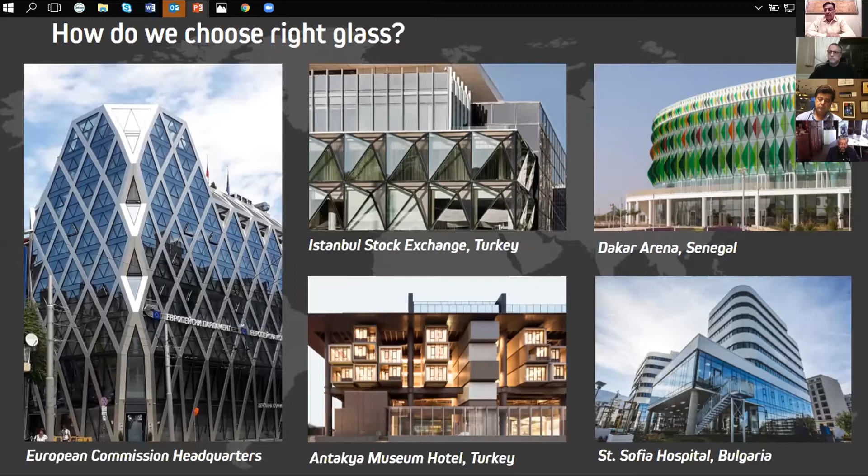What do we do? During the design stage of a project, architects share their first drawings with us, and together we work on their preliminary design and recommend not only the right product according to climate and function of the building, but also tips for optimum budgeting. Then at the application drawings stage comes static and performance calculations. We calculate performance values of the requested combinations, then share reports of the performance values and specification documents with the architects, engineers, or investors in order to include in bid documentation.

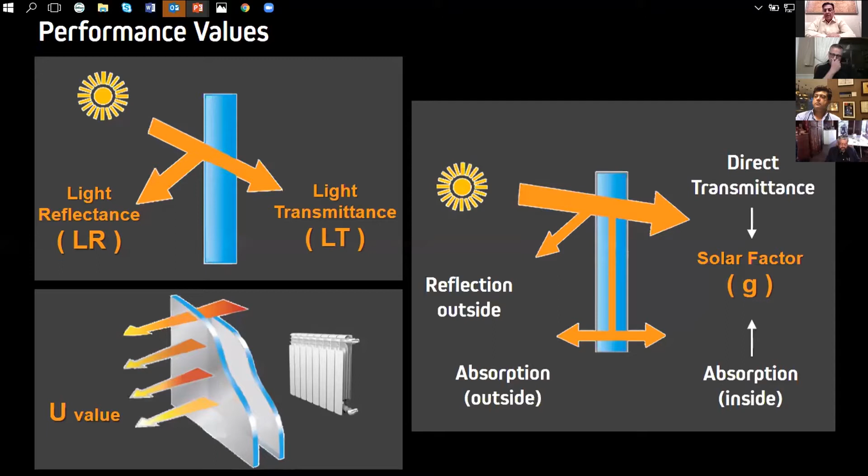Let me start by explaining some of the performance values defined in glass. Light transmittance is the proportion of visible light that is transmitted through the glass. Light reflectance is the proportion of visible light that is reflected from glass. Solar factor is the percentage of total solar radiant heat energy entering the inner space through the glass; the lower the solar factor, the better the solar control. U value is the measure of the rate of heat loss of a building component; lower U value means better heat control. Physical requirements are extremely important for glass selection.

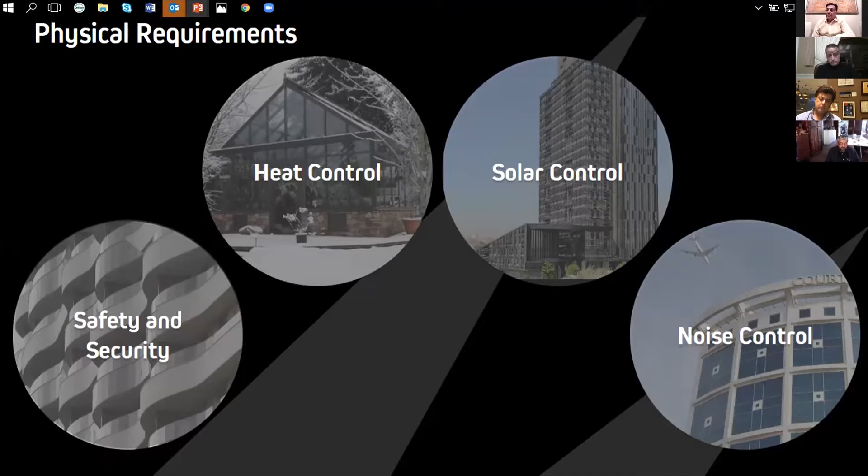Each building has different requirements in compliance with its function. I know that in India, your main problems are the excess heat of sun and noise control. Using the right glass for the project is very critical to meet building physics criteria, otherwise there might be cooling or heating problems that occur later.

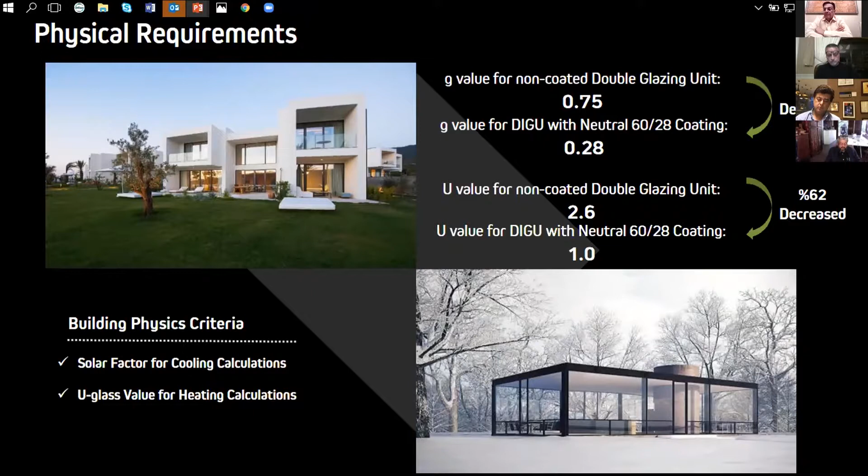For cooling calculations, solar factor should be considered, and for heating calculations, U value should be considered. Another performance value we should think of as a reference is the color rendering index, which describes how much an object's color changes when observed through glazing. It defines the spectral quality of glass in transmission. The higher the color rendering index, the more natural the transmitted colors appear.

Let's take a short look at some facts we should consider before choosing the glass. In spaces that need bright interiors, such as residences, private houses, and educational projects, products with high light transmittance should be preferred. On the other hand, uncontrolled light entry into commercial buildings can cause glare on screens. For shops and restaurants, products with high transparency and low reflection value should be considered to see objects behind the glass better.

The daylight requirement of the project should be determined according to the glass ratio on the facade. The glass type recommended for a facade with entire glass and one with a glass ratio below 50% are completely different. In projects such as offices, hospitals, airports, and hotels, effective solar control should be considered as well as glare control.

So which products are suitable for which building types? We can recommend using solar control low-E coated glass products with a light transmittance of about 60% in order to benefit from natural light as much as possible.

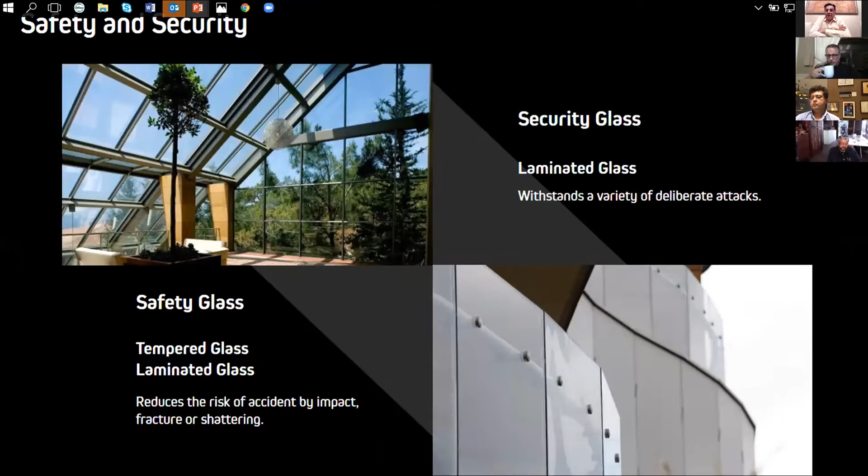Glass is a fragile material and standard float glass has low tolerance to impacts. According to safety and security needs, tempered glass or laminated glass should be used to avoid injuries that might be caused by glass breakage in critical locations.

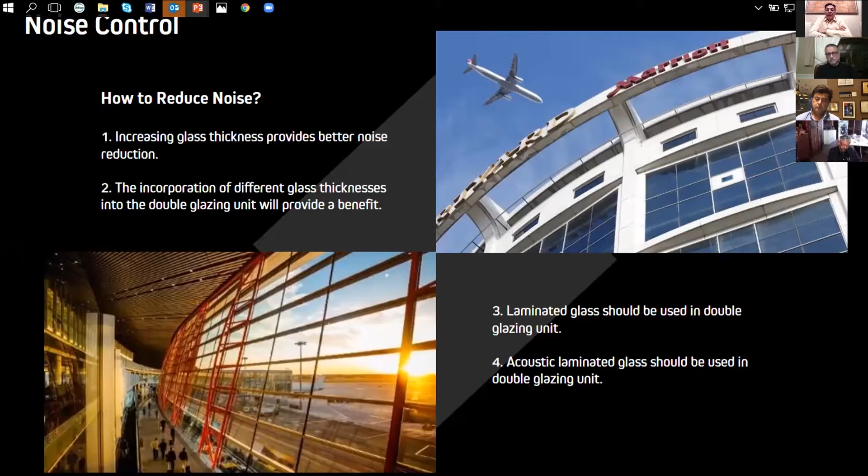The outdoor noise level can be reduced to the level of a quiet atmosphere with the right glass solutions. There are some different methods to reduce noise, and we can apply these methods according to the needs of the project, respectively.

Visual requirements are another point to be considered when choosing the right glass. For low-story residences or hotel projects where the scenery stands out, we can recommend using Neutral 70/37, which has a low light reflectance value that allows the view of the scenery, and also high light transmittance that prioritizes transparency in order to carry the nature to the inner space.

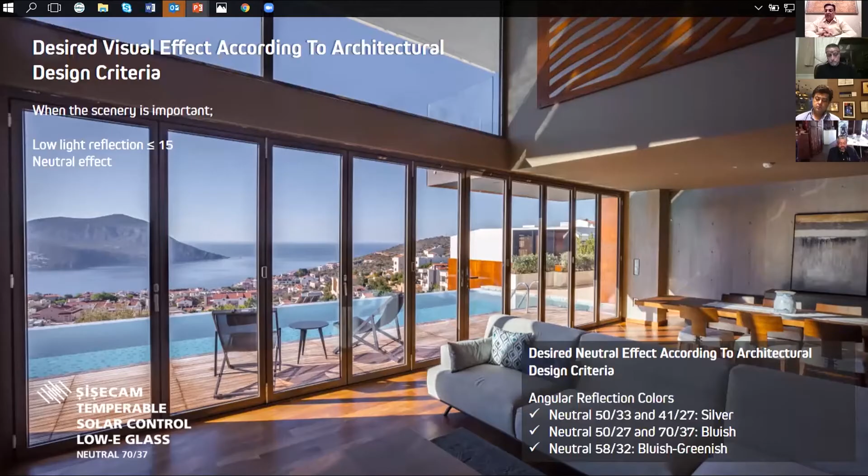By March, a new period started in our lives all over the world. We had very hard days all together, but now it is time to redesign our daily life after recovery. The only way we are getting closer to a healthy world is the proper practice of social distancing.

We got a clear-cut solution that's a glass apart. With the smart use of glass, we can still enjoy human interaction without the risks of human touch. Glass allows us to see each other and talk to each other when we have the proper design for it, but it's also a barrier, and it provides us social distancing perfectly.

In the near future, we may give up working in open plan offices and start working in glass rooms or glass cubicles. There are too many benefits of glass in workplaces: it is hygienic, easy to clean, eco-friendly, and long-lasting. It has scratch, impact, and breakage resistance.

Nowadays, we are getting used to seeing these solutions more often, for example in a fancy restaurant, a cafe, school, pharmacy, library, or hairdresser. The possibilities are clearly endless, and so are the solutions. At Şişecam Flat Glass, we have solutions for all needs of the projects and the unlimited creativity of architects.

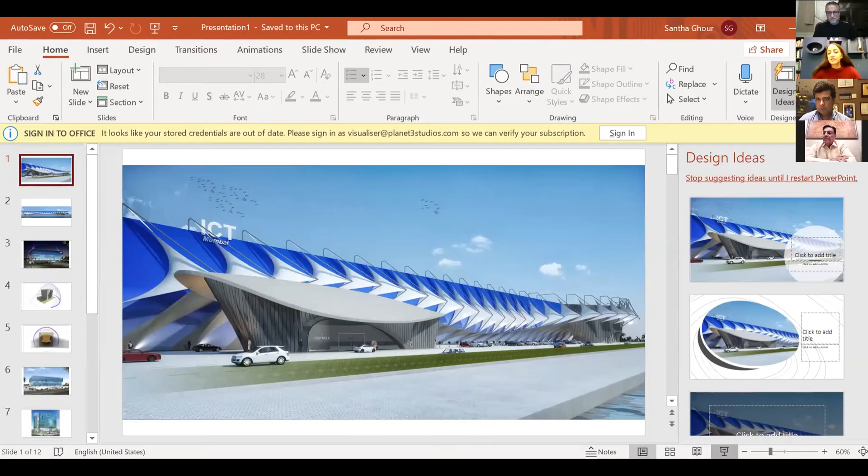That's about it. Going to our work, this is the elevation for the International Cruise Terminal, again a public building, with a long facade of around 250 meters on one side, facing east and west. We are using glass and bent glass on this entire facade. Of course, we're not using just plain simple glass, but going for its variants, adding a decent vacuum gap, adding coatings to it. So just using that basic construction material and accessorizing it better makes it so much more versatile. It lends itself to the building, makes it beautifully transparent, while at the same time giving you privacy. If you add certain kinds of sunshades, it becomes fantastic, like you can see here.

This is on the western facade where you have extreme heat coming in. We are creating these sunshades in exterior fabric of the building, which will take care of the heat coming into the building. This is another of our projects that we had done for Tata's.

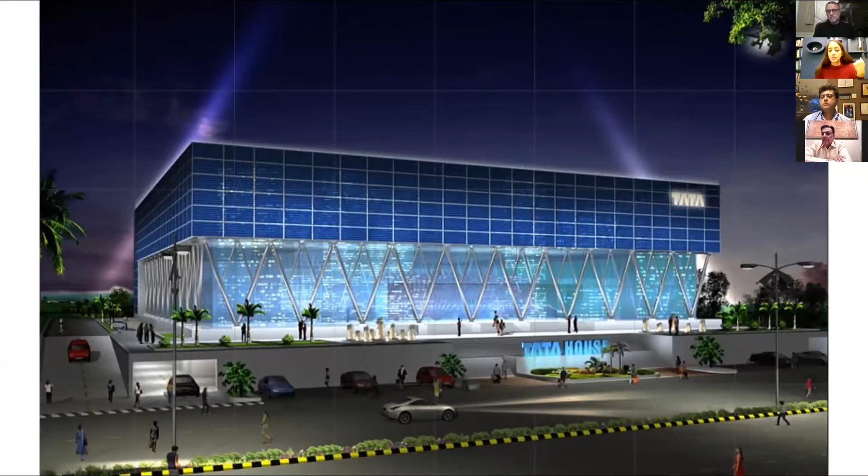This was in Indore, where we did an entire sun path diagram just to see how much heat load is coming in and what kind of glass would be suitable, the exact kind of lamination that would be suitable. Below you had retail, above you had a commercial complex. The upper part had solar panels, which also lent itself very nicely to this public place.

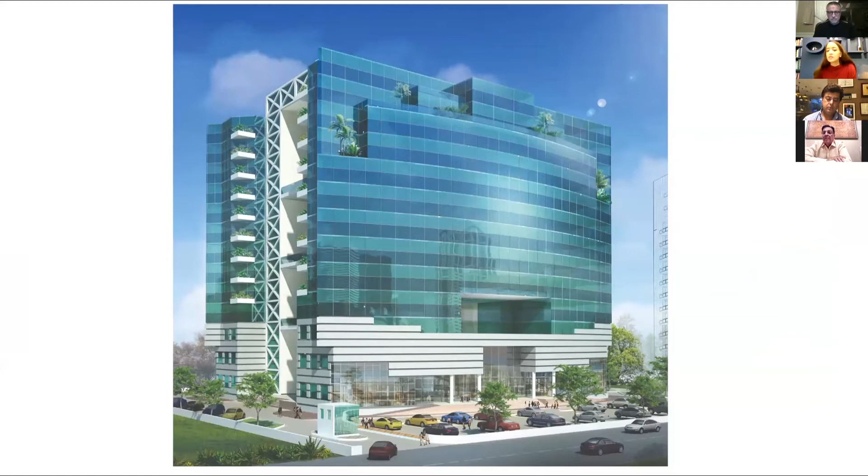This, of course, is like a standard elevation in glass. But there is so much you can do to glass - the colors, the coatings, the film that you can add to it, the sunshades that you can add to it, and so on.

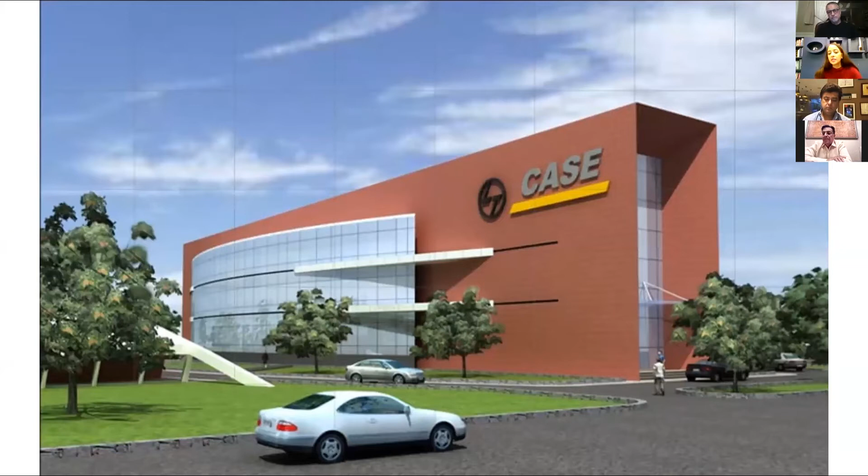This building for L&T that we are doing is currently angled in such a way - we did a lot of research just to see that the sun hits it at the right angle so that it does not take in a lot of heat coming into the building.

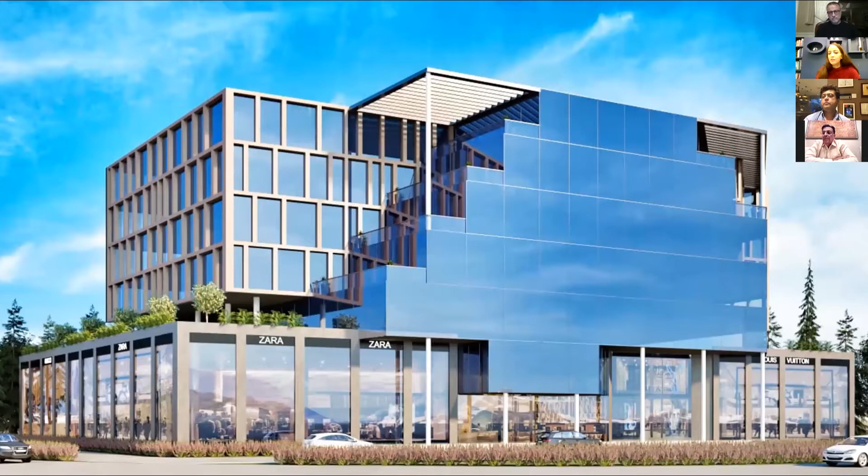Various other projects happening in glass. This is happening in Jammu. And of course, the recent teeny tiny project that I really love. So that's about it. My love for glass has been there for a long time, and it's definitely going to stay for times to come.

Okay, I want to just share something after you've shared. I just thought of sharing something what we are doing, and this is a project in my hometown in Iran, and this is an IT building.

So we took all the concepts that is there of an IT building, because this city is a 2,500-year-old city, it's a World Heritage Site, and it has got a lot of mud houses and mud structures. It has a particular characteristic, so we got those characteristics - the exterior facade is closed, it doesn't have anything.

All the buildings have 3 blocks because there are different users there. Each of them have an atrium and are inward looking, and there is a double wall outside - a double screening, a facade outside with photovoltaic cells, because the heat is very good there. So the electricity, the energy generation is very good, and it keeps the sandstorm out.

So we worked this out, and it's an IT building. On the atrium, we came up with this concept of the motherboard, and we are doing laser printing on the glass, which is laminated glass with the laser printing. I just thought I should show this.

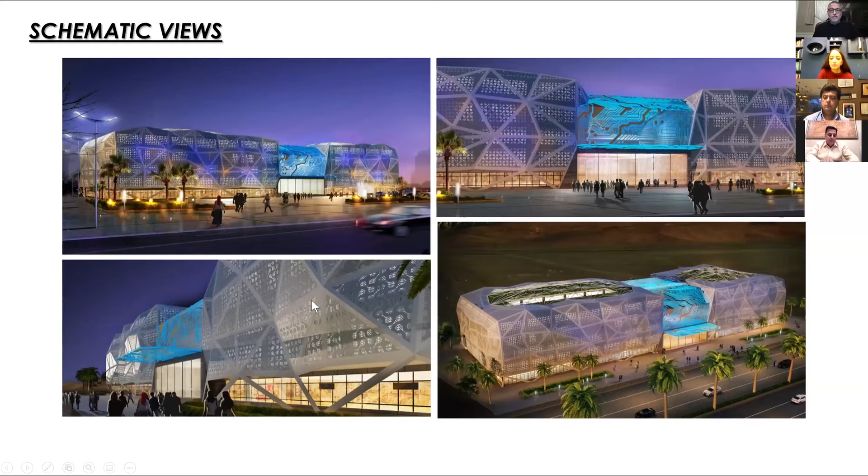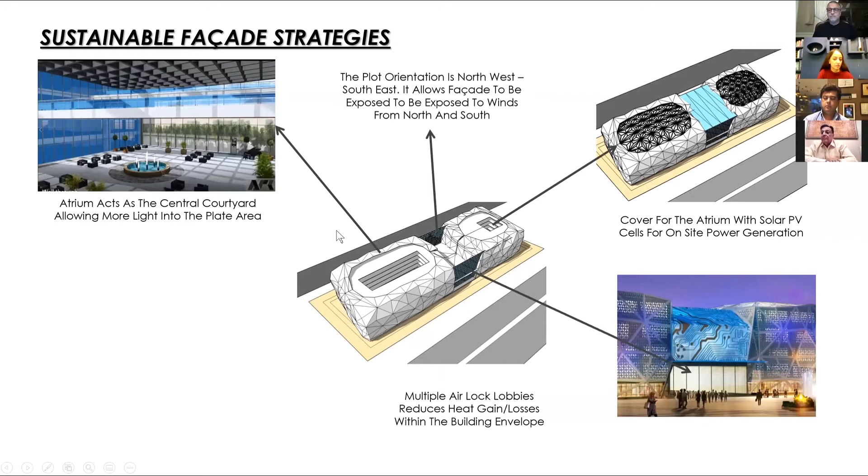So this is the way how we have the central atriums, the internal courtyard kind of things. And that's the final product, with the double wall, double skin in the facade.

Ravi, I'd like to ask you, what are your thoughts on parametric ideas? What's your thought on parametric structures and the use of glass externally? Ravi, you're on mute.

It's an interesting phenomenon happening world over. It's a kind of semantic which was always ingrained in the way we thought of doing many objects without having the perception of resolutions of geometry. But now it's becoming an expressive idea of how you can bring in the structure or skeleton of the geometry and make it a visible factor.

For example, when you look at glazing or glass systems using spiders or bolting systems, you actually have a strange structural phenomena that happens to these junction elements, which is parametric in nature because it allows deflection. The joinery is so intelligent that it allows multiple dimensions of stresses that can come onto a junction and behave in a three-dimensional stress alignment method. So parametric has been intrinsically there in many structural ideas of how things were getting resolved.